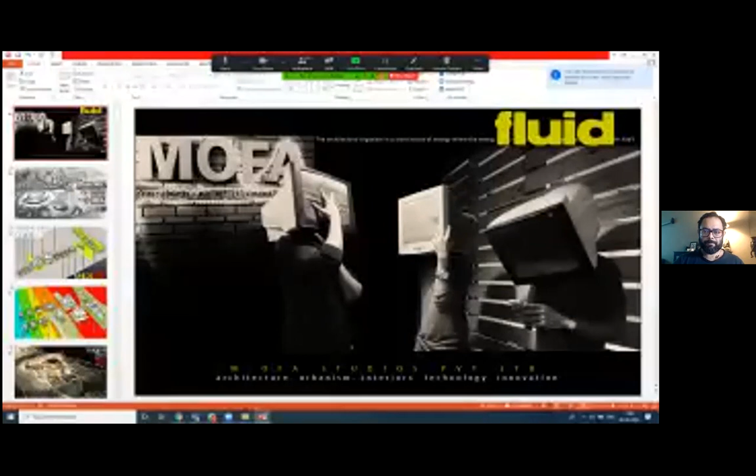MOFA, as we're commonly known, as a practice, we have been around since 2002. Although MOFA was formally formulated in 2007, and in all these years of practice, we have handled various verticals. We've handled more than 170 plus projects.

We've been around in 7 verticals, designed more than 5 million square feet of area. In these last 2 decades of practice, there is tremendous learning that has happened. Each of our works is a new work to learn for the future of our practice. It's always a work in progress. That's the philosophy we've always formulated, that no project is complete. It's always a start or a learning into a new project.

Two of our major verticals that I'm going to be covering today, one being private homes and the other being public spaces. This is a collection of a few of the residences that we have done over all these years.

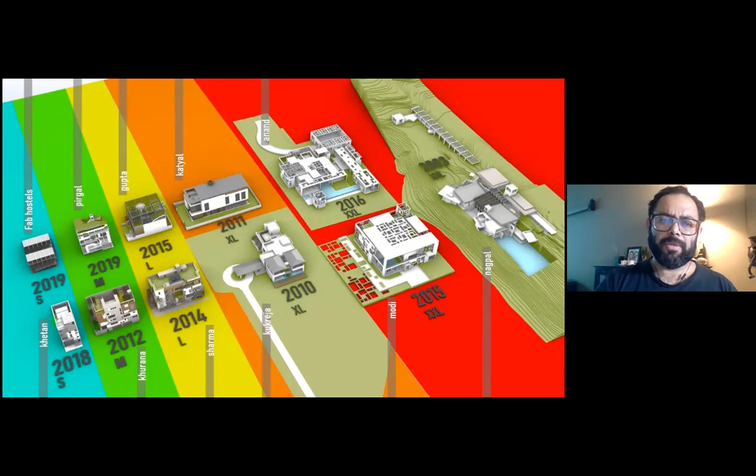What we have come down to now, in 2018, 2019, are mini homes or multi-family residences with residents of about 7 to 8, even going up to 15 or 16 people, interconnected floor-wise, not divided, on smaller plot areas as small as 160 square meters, which is literally 1/20th or 1/25th of the farmhouse plot that we had designed way back in 2003.

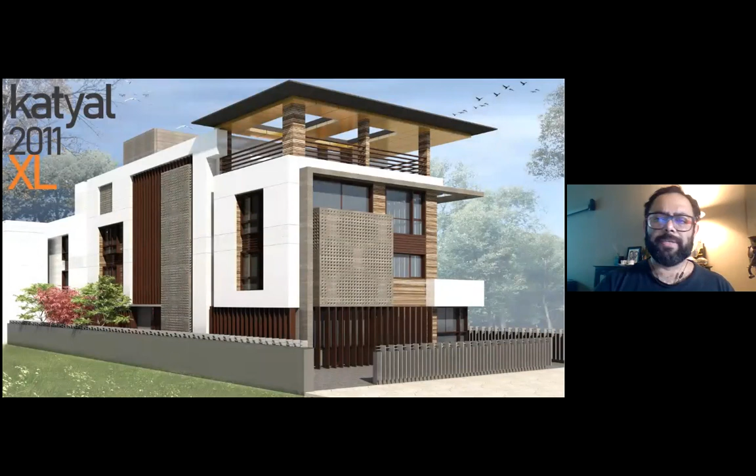The farmhouse that we did — some more large homes, farmhouses, going on to the starting of urban homes with 500 to 800 to 1,000 square meter plot areas in Delhi.

A 500 square meter plot area, multi-family residence, about 15 residents and multiple bedrooms interconnected from within. I'm not sharing details of these houses today, except for one that I'm going to be talking about.

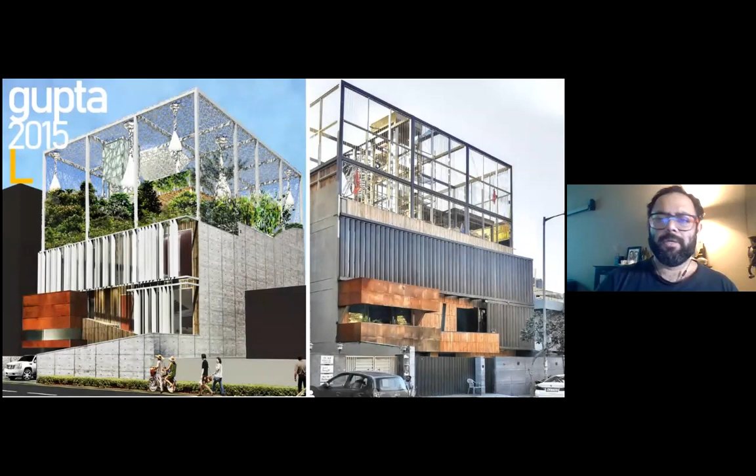Another 500 square meter plot area, multi-family residence interconnected from inside, with an urban garden or an urban forest on the terrace.

A smaller residence, again for a multi-family. The interiors have been connected through the central courtyard, a skylight, an internal space that connects all the bedrooms together.

To a house we're doing in Bangalore right now, which is less than 200 square meters of plot area, and the number of members in the family are again between 10 to 12.

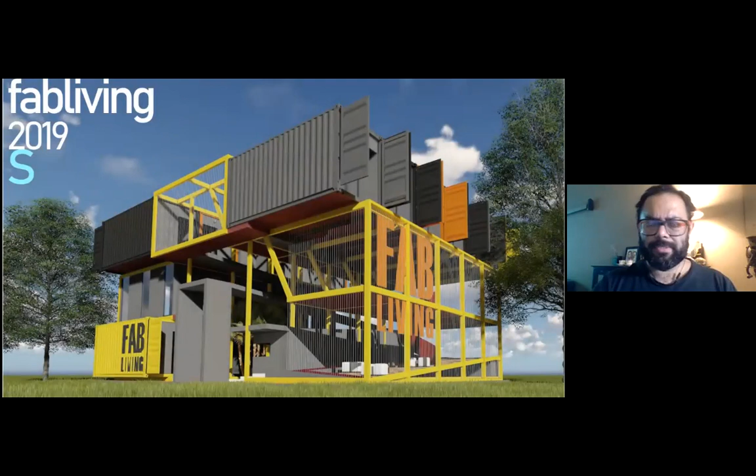A hostel that we're designing, meant for students' housing. I wanted to put this project in particular, which is a low-cost project. We're using containers to build it. About 60 students would be staying here with a plot area of not more than 60 square meters.

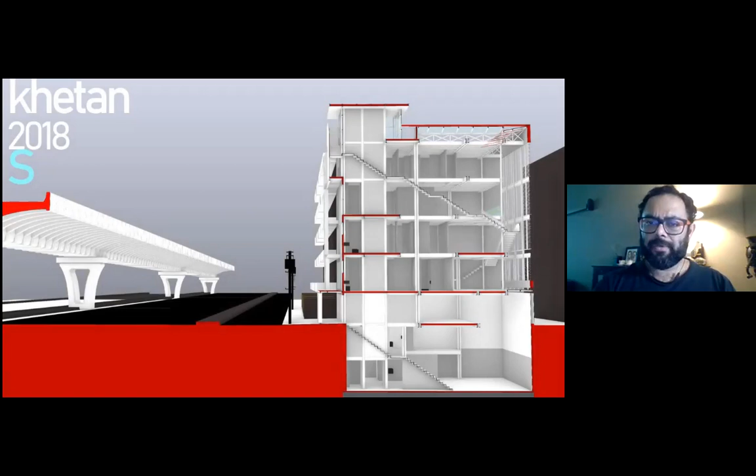To a house that we're dealing with right now in the middle of an urban setting, a highway or a flyover on one side, loud noises, urban traffic, a plot area of 160 square meters, multi-family, multifunctional.

The basement is supposed to be a dance studio run by one of the family members. The upper house is a private home, and also on the ground floor an office for another member of the family who will be running his entire office and operations from home itself post-COVID. As you can see, in a tight scenario, a lot of functions with family members coming together.

This is a house that we realized would need to be constructed in a controlled budget. We are using prefabrication within this. The entire house is done using steel construction and assembled like a kit of parts on site, put together in the fastest possible manner for saving resources, reducing the carbon footprint, and making it into this complex piece of machinery that works efficiently well together.

A short video for you to understand what this whole house is all about. That's the urban setting where the house sits.

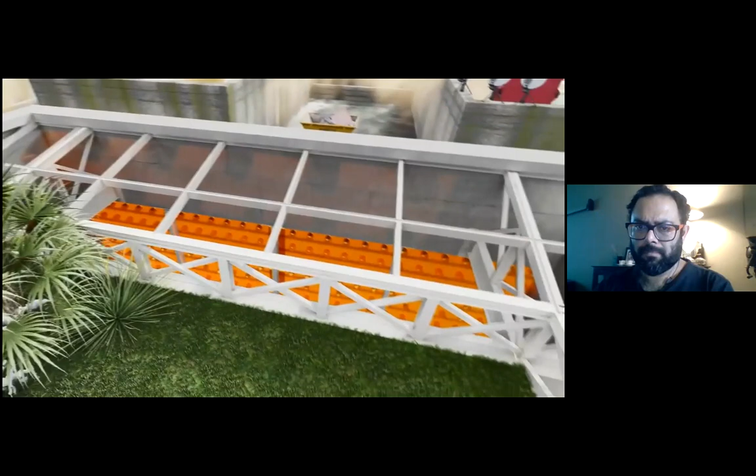Dance school in the basement.

Scale versus challenges. What we have realized over time is that with a larger plot size, no restrictions, and a lot of money, mostly clients are looking for an iconic, high-end kind of house. It's great to come up with these playful, iconic structures, but it doesn't leave us with challenges to develop a new language. As the plot size gets smaller and the budget gets lower, the challenges as a designer increase drastically for us.

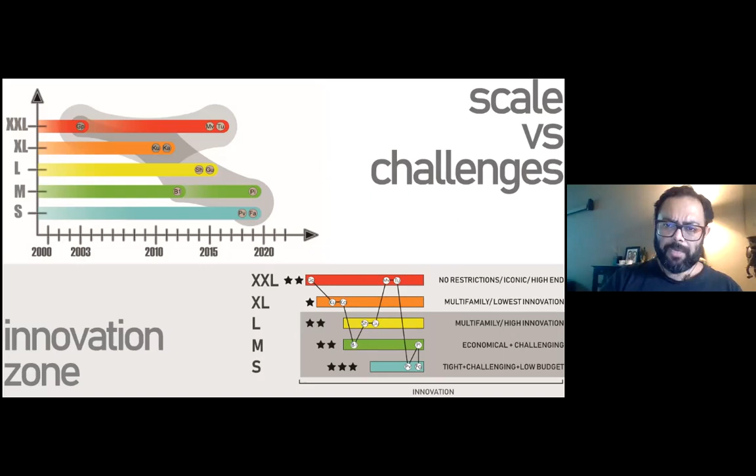Moving on from the houses to some of our other projects, and what we've learned over the years: the first 10 years, when we were understanding what we wanted to achieve with architecture, we went through various kinds of concepts—form related, context related, programmatic—dealing with a wide array of projects.

In the next 10 years, we started integrating services to the next level, innovating with water management systems and integration where various MEP systems could talk to each other, become self-generative, and become not just energy positive but also water conserving—to the point where units start producing their own energy and water requirements, serving themselves, going off the grid.

What we're looking at in the next decade is the use of IoT, bioadaptability, and a lot of simulation to test and try out our models and various project aspects. Ease of construction from fabrication in the factory straight onto the site—how we can smoothen our workflow from design through manufacturing, construction, fabrication, and assembly on site, without much error, while keeping budgets and time in control.

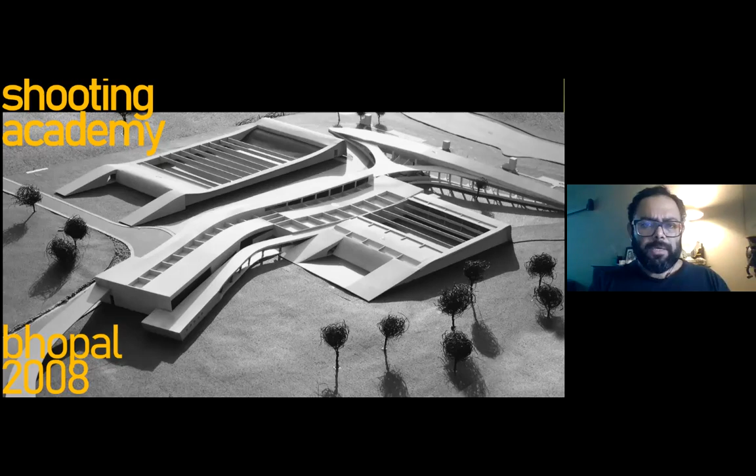An office, down to a resort which started in 2010—a project we perceived as biomorphic pods that would sit or grow out of the site just like an anthill, with units that could grow moss and grass all over them and disappear within the existing landscape.

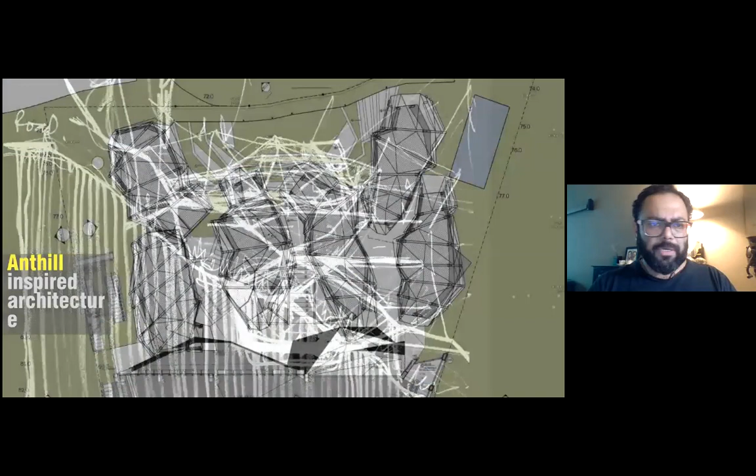On a site in Nagar, close to Manali in Himachal Pradesh—that's the site, that's the view from it. This was our first sketch, an anthill-inspired architecture: pods growing out of the hill, 6 pods which have now become almost 6 plus another 3 units accommodated underneath—9 total units in this small resort.

With the growth of moss over it—there's a lot of moss that grows automatically on rocks and concrete surfaces—we've researched a lot on the local species that grow without any maintenance on top of the concrete roof. We intend these blocks or pods to merge with the entire landscape, with just these skylights like eyes into the sky, looking and getting light through them.

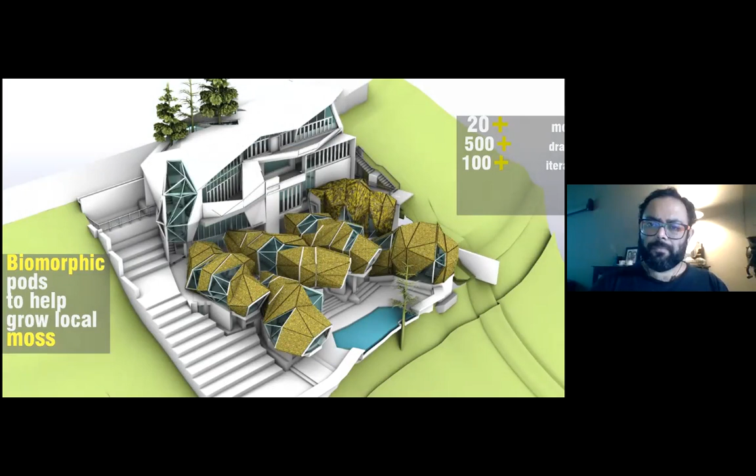Being a hilly site, the construction is extremely challenging. We are not able to construct more than 7 months in a year because of snow, rains, and other factors. So the construction has been painfully slow, and it has helped us understand a lot about the construction industry when we have to conceive designs like these.

With RCC walls on the lower level to hold these pods together, most of the units on top have a steel structure that came as prefab frames from the factory in Delhi, assembled with connecting arms in between, again done as prefab, and covered with a ferrocement shell because that was the most feasible and economical solution given the site, conditions, and budget for the project. A thin shell of 40 mm with insulation has taken care of all our needs for waterproofing and even the snow loads outside.

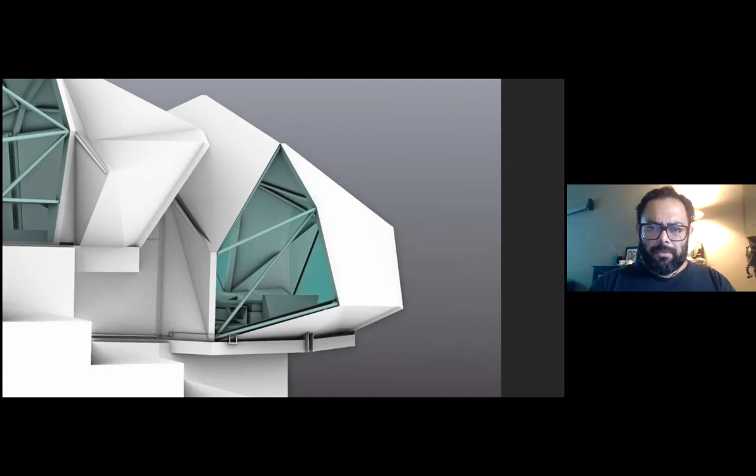The unit that sits looking onto the valley. At this stage, the glasses have also been put in, and the interiors are going on—a painfully slow process. We still haven't been able to complete this project.

One of the biggest challenges we faced was with these triangulated skylights and openings all over these pods—how to make them dark if needed, since these are resorts, and if people need a complete shutout from light in the afternoon, how would one draw curtains on them? For that, we resolved to a childhood technique of making origamic fans.

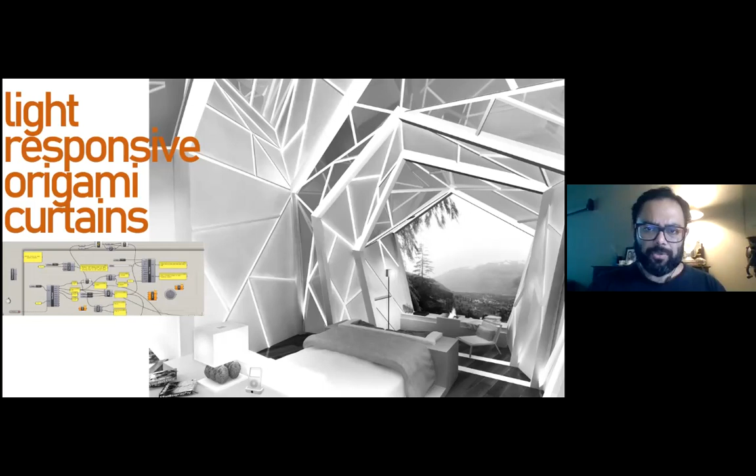We explored how these fans could be automated—curtains that open out like origamic fans, which are light responsive or could be manually controlled. We built a small prototype using a paper fan in the office, did the programming, put the sensors ourselves, and ran multiple experiments with series of changing light conditions, colors, and spectrums to see how these fans open out and how fast they respond.

Based on this, we have now proposed to make these curtains on our own. We've tied up with an agency for which we are doing the programming, helping with the hardware development, and these curtains are going to be put in place for these units.

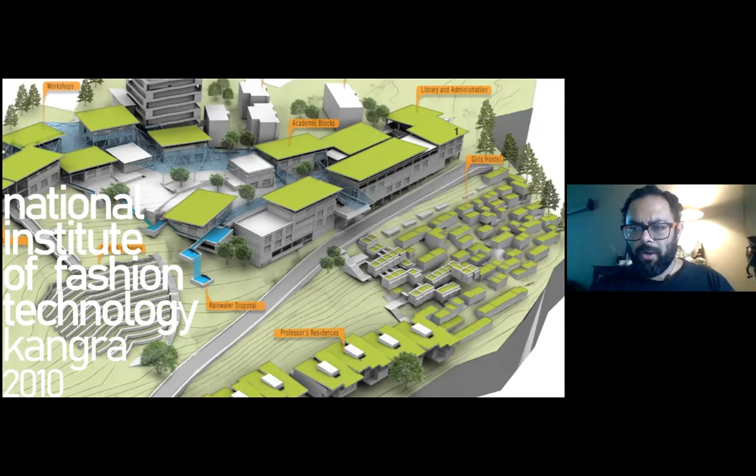Coming on to the National Institute of Fashion Technology in Kangra, 2010—we won it as a competition, an institution and a student housing on a hilly site of 16 acres. Kangra, if you know, near McLeodganj is at a moderate height, and the site offered us a difference of about 40 meters from the lowest to the highest point, with almost 60 to 70 banyan and mango trees.

This is the site particularly for the hostels or student housing, where we decided not to cut even a single tree or touch a single branch, but to map the site in detail—including its contours, trees, branches, and foliage—to such an extent that we could do an integrated design within this whole scenario.

So right from contour mapping, dividing these spaces or rooms—which we called modules of 10 feet by 10 feet, rather 3 meter by 3 meter—we divided the entire site using a grid of functional cubes, in a way that another thing we didn't want to do was grade the land.

We didn't want to cut the land and make platforms, usually how it's done in the hills for any modern construction, because not only do you lose the ground cover, but you also lose in a lot of areas the natural water flow that was always there on that site.

So we wanted to go with the natural flow without disturbing the land and place the units exactly how they could organically come up, like any other village in Himachal or Kangra, because each of those units comes up wherever it is without disturbing the sensitive balance of the land.

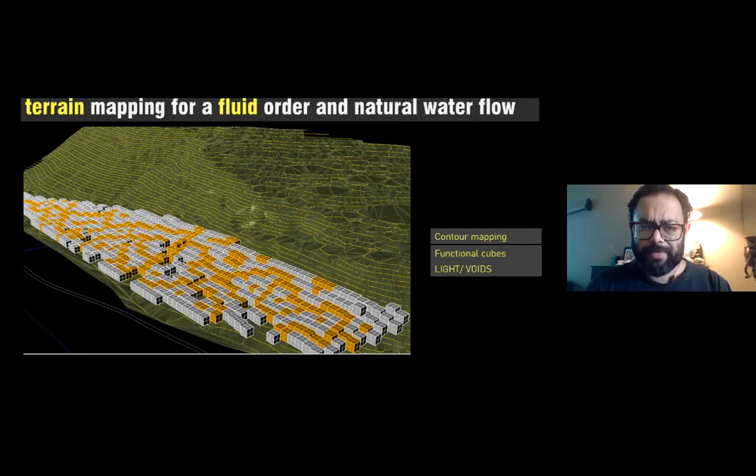Introduce the light cubes where the voids, lights for ventilation that would come in, the circulation routes, plinth formations, the lower level, upper level, vertical connectors.

The entire plan sort of emerged in a very organic manner, where these cross fingers of corridors ran at various levels, each of the units also sitting at their respective level of the contour itself.

Some photographs during construction where the existing trees are respected and held together using retaining walls, a larger area around them. Each tree was given close to 3 to 4 meters of area so that the roots could have enough space to grow and not jostle with the concrete or the retaining walls of these structures. So the existing trees and the architecture are integrated within that network of trees.

Steps, corridors, each unit at a different level, a simple language that helped us achieve a lot of outdoor spaces for the students to sit around, to think, to mull over, and a perfect ideal setting for a design institution.

In 2010, we won another competition to design an office for Delhi Pollution Control Committee. Here we wanted to create an example of an office that would go completely off the grid. And being an office for Delhi pollution control, we wanted to create an office that does not create any pollution.

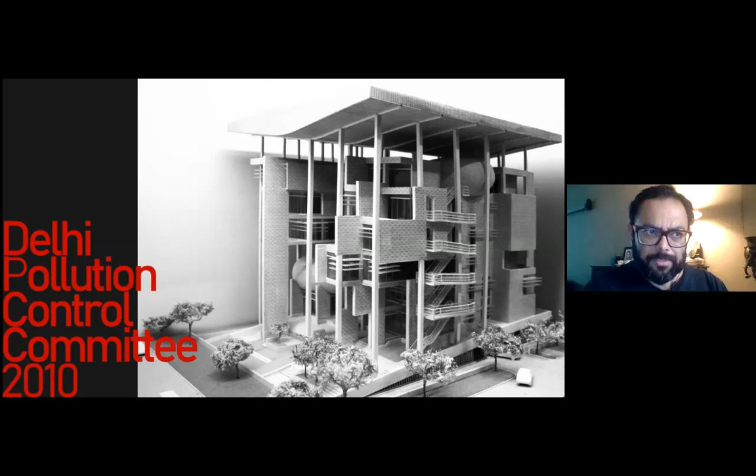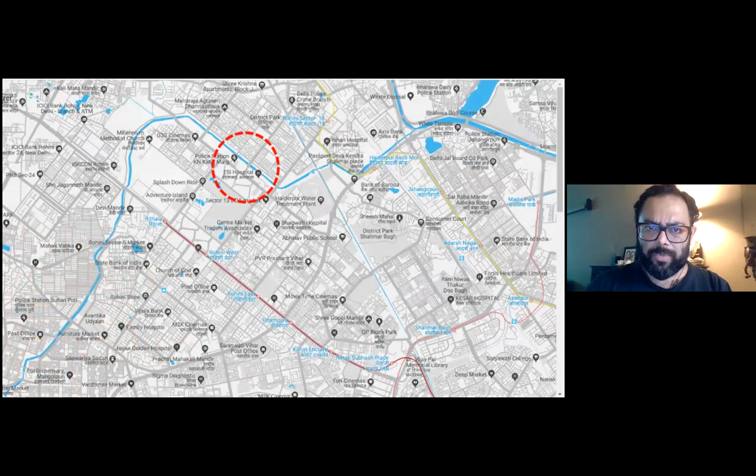Not just that, it also absorbs the pollution of the surrounding area, the context, like a sponge. The site given to us was in Rohini, next to a sewage drain, a large nala, which we used to our advantage.

We proposed to the government to tap the sewage water from that nala, generate gas for energy, liquid to use for our radiant cooling systems in the air conditioning, and the remaining segregated solid matter as manure for the vegetation all over the project.

We drew out a very detailed integrated systems plan, a flowchart of some sort where one system would help the other in terms of talking to each other. Using IoT, each of these systems would create or restore that balance where the entire office does not have to look for any energy requirements from the outside. It could go completely off the grid.

It would generate its own potable water from the rain, and it would manage its own garbage in terms of generating energy. Plus, it would use the sewage water from outside to generate energy.

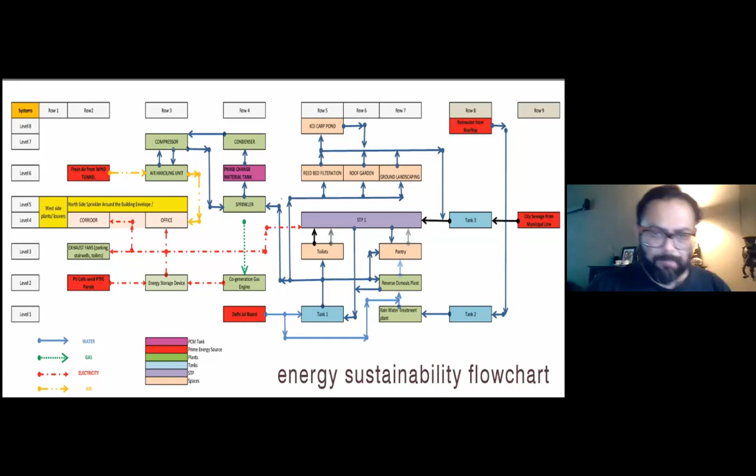At the same time, we worked with some scientists from Ahmedabad to come up with bentonite walls, or clay walls, that could absorb a lot of carbon particulate matter from the parking lots and give out clean air into the environment.

So as a concept, it was well worked out in how it was going to be. We had TERI involved with us doing the systems management and coming out with an entire report. Unfortunately, the project got stuck with DDA in Delhi because of bylaws.

We were not allowed to build that roof on top, and we were not allowed to do a lot of these setbacks and things. So a project of this kind, which could have become an office for the future, was just closed in our books and for our future studies.

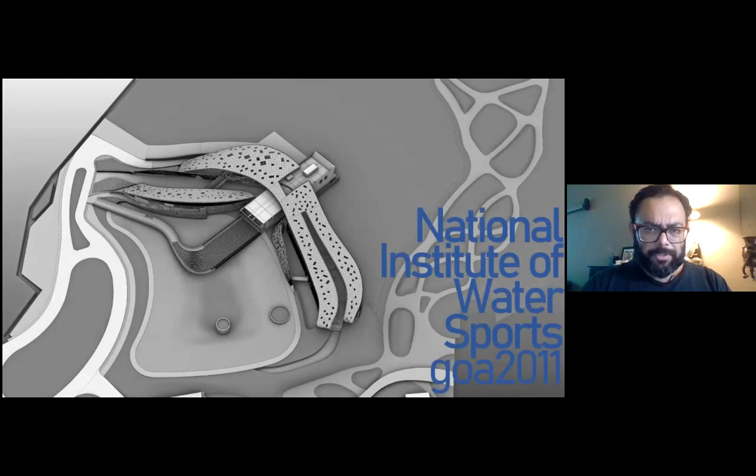Another project in 2011, National Institute of Water Sports in Goa, won as a competition, set us onto a new challenge in construction, a new challenge in technology, and how to manage projects of this scale, not only by integrating prefabricated systems, but how to use parametric architecture and simulations to test each and every aspect that goes into building a project of this complexity and nature.

As a concept, we saw this building as a link between the sea and the surfer. Now, National Institute of Water Sports, if you guys know about it, it's a Ministry of Tourism venture in India.

It's one of the only kind of project in Asia that gives licenses to adventure water sports players. It does training courses for the Navy in scuba diving and rescue operations, also training courses for lifeguards all over India, and for all adventure sports related activities. So it's one institute that takes care of everything related to adventure sports in water, rescue operations, and even Navy operations.

So we saw this building as a very dynamic link between this energetic water that you're always dealing with, or the person who was always entering the sea, and we wanted to translate that same energy field in the language or storytelling of the architecture.

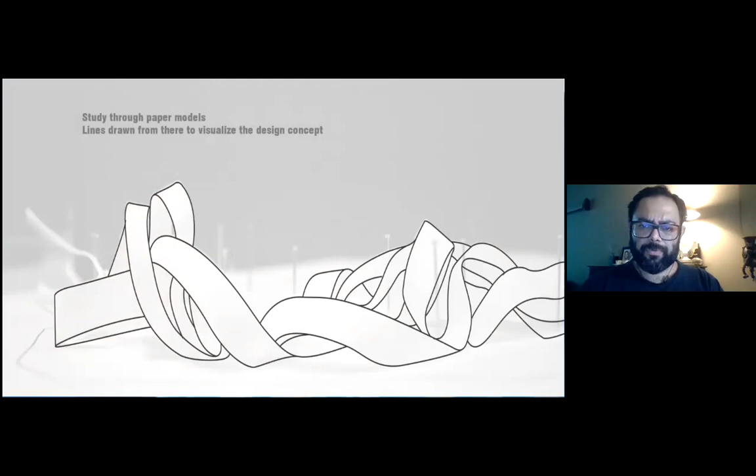As a link between the sea and the surfer, as a tussle between the two, as a tension between the two, we wanted to have this sort of tension in the form and its spaces replicate it, and to stay as and when a person walks through it, to feel that kind of tensile forces through it. We started with the study of paper models to visualize how the waves, how the interlocking of the form, how these things could work.

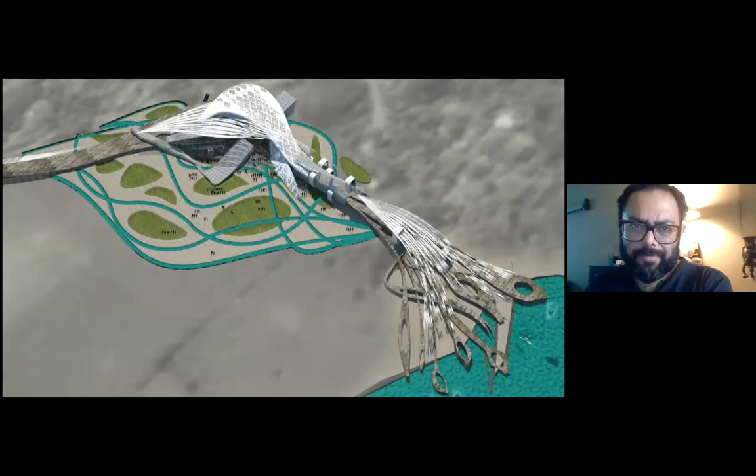Through a series of paper models, through a series of experiments, I think we must have done close to 70 to 80 iterations of this, clicked a lot of photographs, and we finally came up with the first model, which looked like this, which literally is a link between the land and the sea with these jetties going out into the water.

This was a competition entry from which we won the competition. And when we started building the project, it had its own set of challenges with this roof, which is more than 4,000 square meters of area, completely parametric, no module equal to each other, and a mammoth construction that lies in front of us. Because if you know, government constructions could be tedious.

It's done by contractors who are not, it's a low cost, it's L1 bid. And to build a building of this sort has challenges equivalent to, let's say, if you're building a rocket and you're giving it to an L1 contractor, which usually does happen with building rockets in NASA also. But you have to be very, very clear about your documentation, about your drawing, or what you're proposing and how you're doing.

So a tedious tendering process, a detailed tender was done by us. We knew about the entire construction at the time of tendering process, which means the working drawings were completed beforehand. More than 200 iterations of the roof were done, simulated, generated, with daylight simulations, skylights, how they would be, depending on what space requires how much of lighting. That was the first analysis.

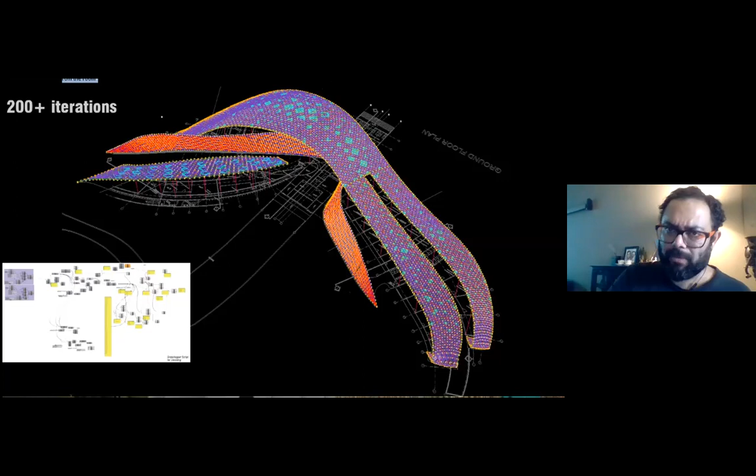And an organic model was developed. We had to control costs. We had to get accuracy of this parametric design. And the accuracy we set was a tolerance of plus minus 10 mm, not more than that, for a project of this scale.

Being restrictive in its budgets, we could not use cranes or other mechanical means to assemble a roof of this kind, which means we had to subdivide this large roof into smaller modules, like a small puzzle, which could be assembled back onto site again. So a streamlined roof was designed, which could also dissipate the wind pressure coming from the sea and make it more structurally safe and viable.

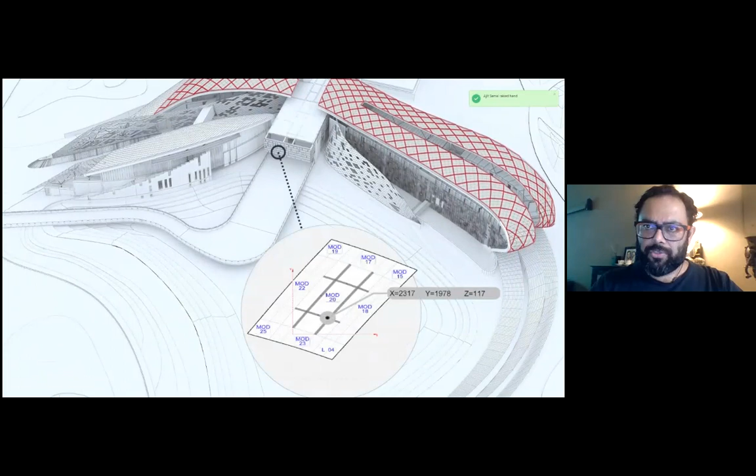To build each module, all the working drawings, all the fabrication drawings were generated within our office. X, Y's and Z's for every part of the joint junction detail were given. And that was assembled. The Z's were achieved by all the waste reinforcement that was lying on site. So we built a platform of 5 meter by 5 meter in steel, a flat platform, and all the Z axis was achieved by using waste reinforcement cut into exact sizes, stack welded, so that each and every module could be individually made, generated like this, lifted by hand, joined together, welded into a large composite roof.

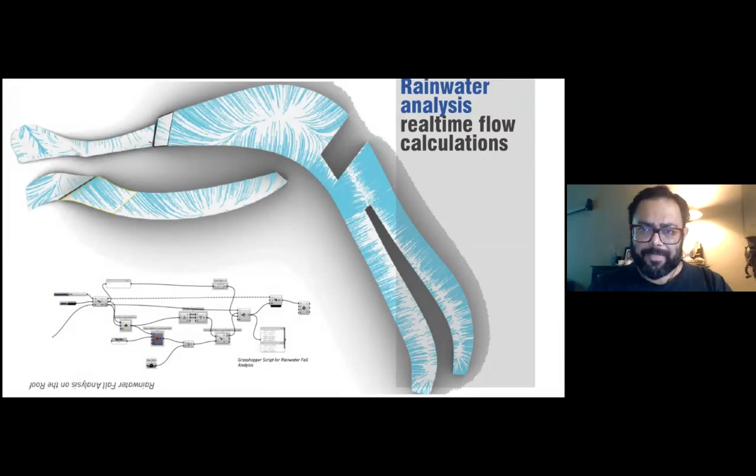We also did a detailed water analysis, a real-time rain analysis of Goa, because rains in Goa could be monstrous. If you've not designed for it, it could be a disaster. Looking at the water flow analysis, we were able to design the gutters.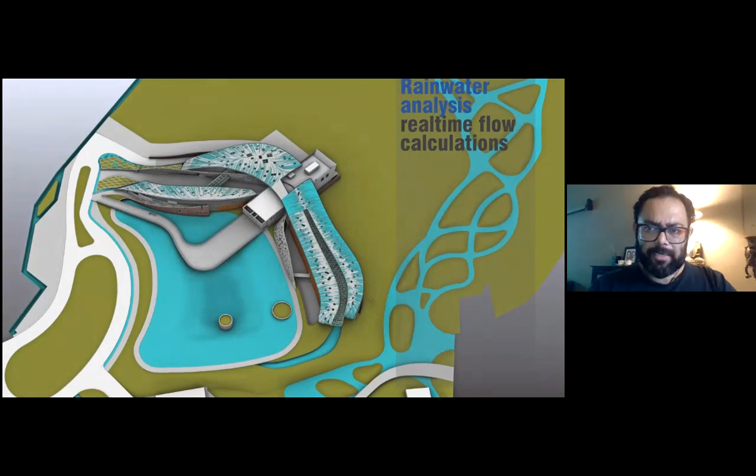We were able to design the water flow on the entire site, thereby creating a large water collection pond, also for use as potable water for the institute, and create these on the periphery, this entire barrage of mounds, which could break down the high tide waves coming from the sea, so that they don't flood the entire site during high tides and high wind and high storm situations.

A double roof, with the help of my friend Samir Kumar, who's also from CEPT and my batchmate. We came up with this entire double roof pressure equalized system, which I can explain in detail much later during the questions.

More than 5,000 drawings were generated for the roof. For the roof panels, we used a simple color-coated sheet, the cheapest available material in the market, to make these origamic folded panels, assembled on site, which is going on right now. All the panels have been factory cut, CNC bent, brought to the site, and are being put up as the final roof.

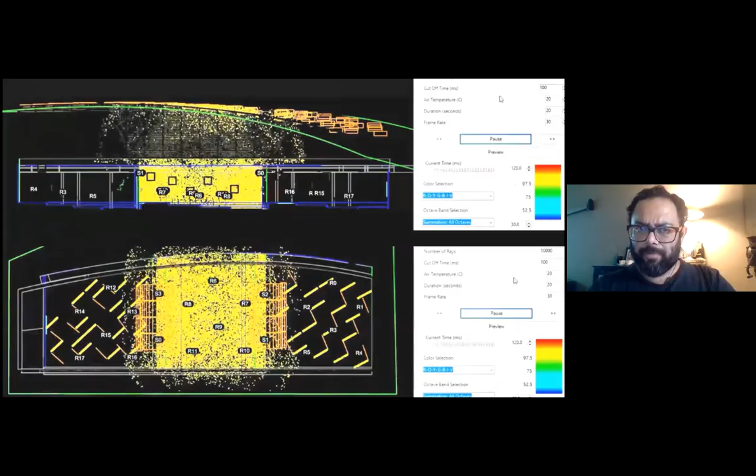Being a large open roof, we needed to do an acoustic simulation so that the sound from one classroom does not spill over to the other. We designed these floating acoustic clouds, which suspend from the ceiling, and ran a lot of simulations placing speakers and volumes with various people as receiving and delivering points, checking what is the best insulation material and design to prevent sound spillage between classrooms.

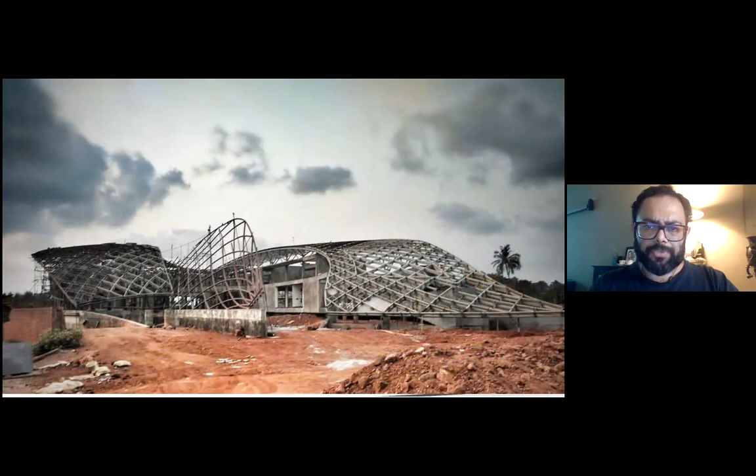So this is a project which is almost towards its completion. In the next 6 months we'll have this building ready. Here are some photographs during construction, taken last year, from the model to the actual construction. We managed a tolerance of not more than plus minus 10 mm, and the entire roof is precisely fabricated as what we had planned.

It's a relationship to the sea.

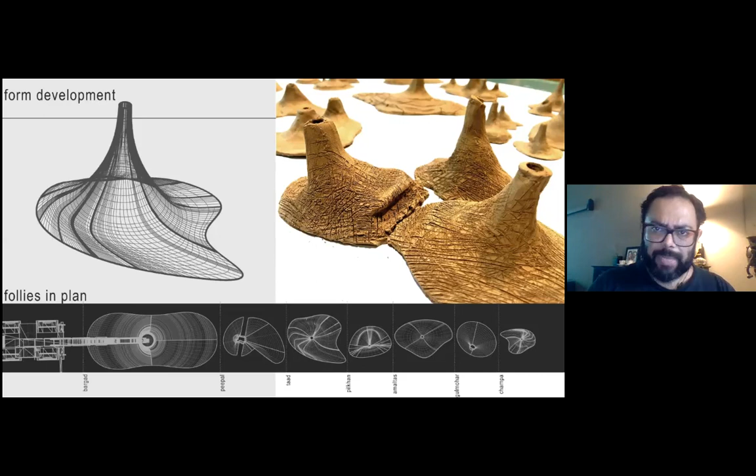We created this as a dedication to all the trees being rampantly cut in Delhi due to rapid urbanization. We studied about 8 different trees commonly found in the landscape of Delhi and represented the cut forms of those trees. Usually when trees are cut, the stubs are left behind, and those stubs remain in the city as this ugly reminder that the tree has been removed. So we used that expression of the stubs, created through scrap steel, as a giant 1:1 scale reminder to people of what is happening all across due to rapid urbanization.

A lot of models were done in clay to understand the form. We worked with Sushant from RatLab, who had also interned with us before going to AA in London and then Zaha. I collaborated with him, and we worked on the site itself for about 8 days.

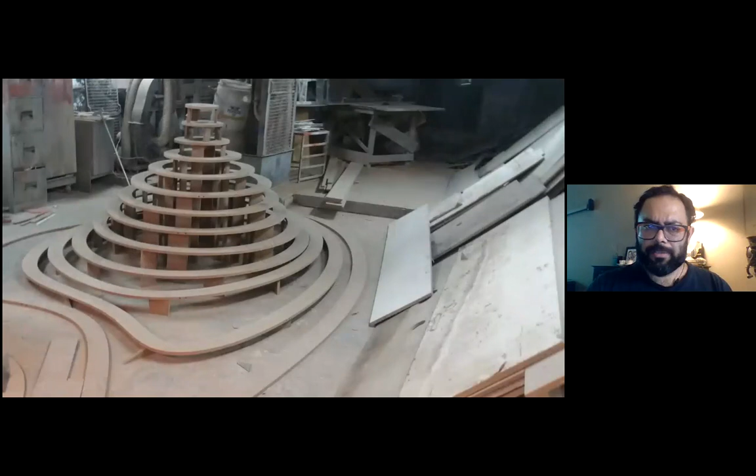No drawings were created for this project. We worked only through models and through coding. The internal structure was done using MDF, and then the outer structure was assembled on site by various craftsmen using their own individual techniques.

So the group of craftsmen each came up with their own technique of welding these 1-inch metal strips. We collected a lot of scrap metal from the market, got it cut into strips, and the entire structure was covered using these strips by the craftsmen individually. Individual patterns of weaving and covering emerged over a period of time, over these 9 days.

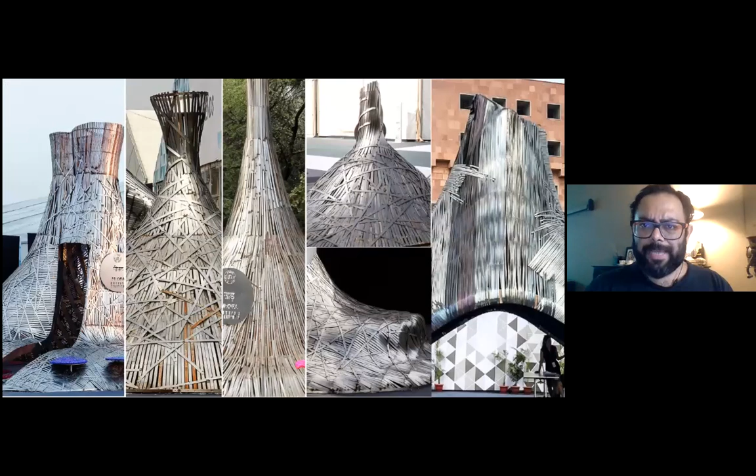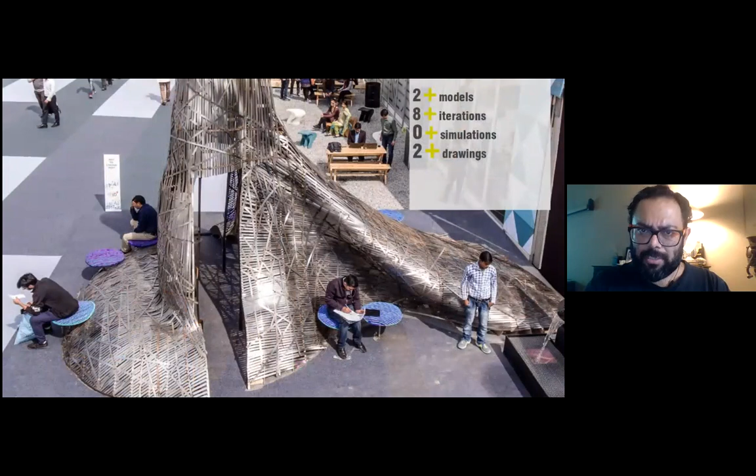What we were able to understand and study was how the human mind works, or how a craftsman's mind works. Usually we work with a lot of written algorithms, but the problem with an algorithm is it's written by one person, so it doesn't have the complexity of the human brain. Here we wanted to integrate an algorithm written on the computer along with 40 different brains, who would integrate it together seamlessly and come up with something new and unpredictable. So a right mix of intuition with logic resulted in these forms, these skins, these structures, which shimmered in light and looked different. A small movie just to show how the assembly happened and what these structures are about.

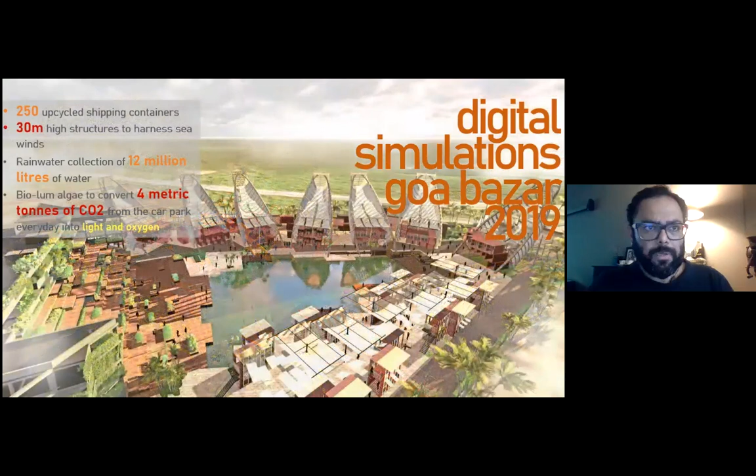In order to understand wind, we did a detailed CFD analysis. It took us about 6 months, where we got real-time data from the meteorological department, wind movement at every 3 hours over 1 year, and we simulated that to see how the wind could be brought down, whether it would work with the structures, and how the structure could be changed, revised, or formulated, keeping in mind getting these winds.

What we were aiming at was a feels-like temperature. A feels-like temperature is a combination of a dry bulb temperature that you measure on a thermometer, relative humidity, and wind speed. In simple terms, if it's hot, less humid, and there is wind, you will feel less heat compared to a high humid area.

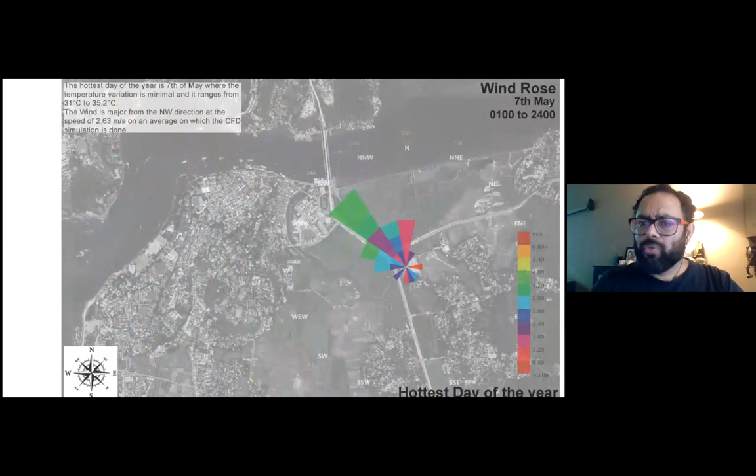So we wanted to create a better feels-like temperature on the site. We considered in simulation the hottest day of the year in Goa, 7th of May, temperatures ranging from 31 to 35 degrees with almost 100% humidity. Wind speeds at 2.63 meters per second was used for the CFD analysis, and the major wind direction being northwest.

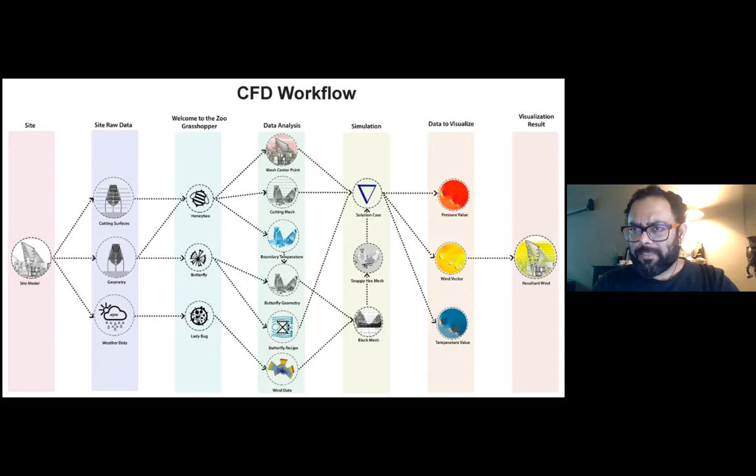Multiple data analysis, right from raw site data, structures, and weather data was put into various softwares, including Grasshopper, simulated, combined together, visualized, and the visual result was put together, which I'm going to show you today. What we were able to analyze was that we were able to get the comfortable feels-like temperature from 33% to almost 44%, double the amount of what would be achieved without the use of any air conditioning or mechanical methods on ground, like large open coolers which would just run with sea winds.

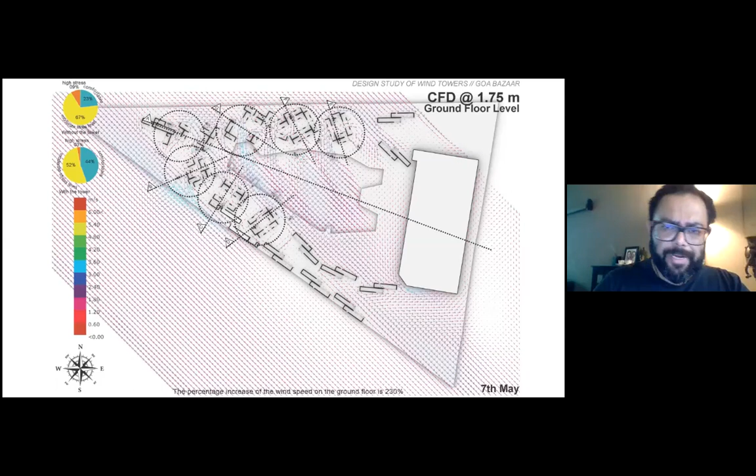A visual simulation, just to make you understand the principle behind it, is basically funneling that large wind from the top down to the ground and naturally ventilating the site.

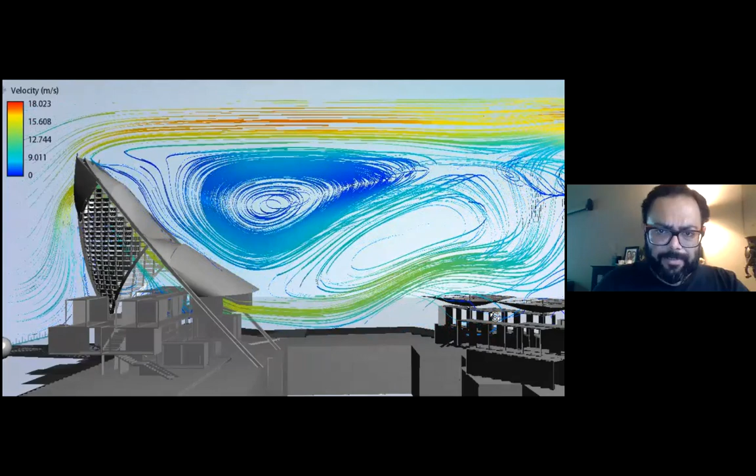An adaptive reuse competition we entered last year in association with BRMA, Batul Raj Mehta and Associates. Batul, again being my batchmate from CEPT, was involved in the museum planning of Bihar Museum with Maki Associates, and we associated with them to formulate the program for this project.

There's a competition that we were entering in Kashmir. This is an adaptive reuse of a 120-year-old silk factory complex into an arts and crafts center.

What was important about this project - this is a site photograph. Who are our stakeholders? What is it that we want to build? How do we want to go about it? Three important questions, along with a conservation approach and methodology of studying each and every building.

We made detailed documentation through drone shots and various other methods. Then Article 370 came in and we could not go to Kashmir, but we had enough drone shots for us to generate detailed drawings and the entire model for us to simulate and work together.

Our vision for the program was to celebrate Kashmir, revitalize the skilled craftsmen and the industry, and make the project highly viable by making it self-sustainable.

Three stakeholders: local community, creative community, and the cultural tourists who would visit this Resham Khana. A cultural tourist platform, a community platform, and a creative platform with a functional diagram was developed by BRMA, which was given to us for us to work further on this project.

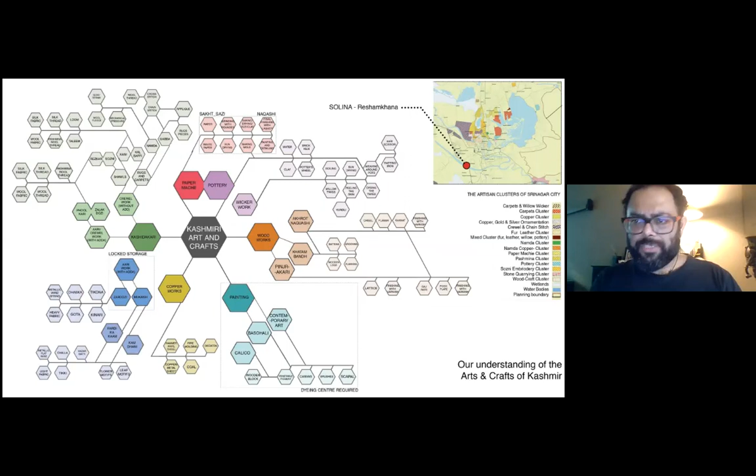This was supplemented with a macro-level industry map spread all over Srinagar showing how each and every craft usually works. We mapped the existing trees as usual - mulberry trees, chinar, and walnut on site - and studied the water flow, as this is a highly flood-prone area.

For design intervention, we realized which buildings have to be restored, altered, some buildings that need to be rebuilt, and the newer construction which had come up as an ugly intervention to be demolished.

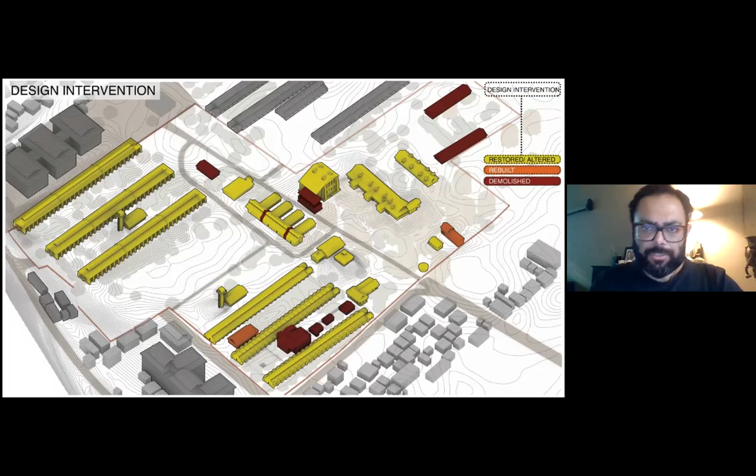A zoning concept emerged from there where we realized that there's a third space - an undefined space - that needs to be generated or created in the form of urban plazas within this.

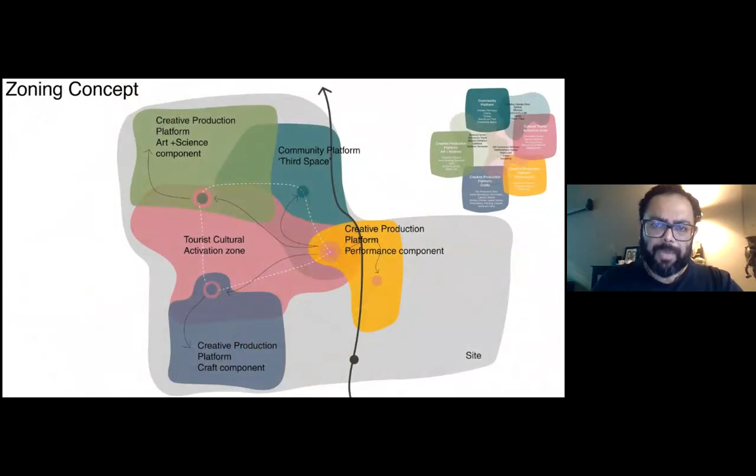We simulated people, creating a lot of codes and simulations where we could look at densities versus occasions and events on particular days, simulating the most probable pathways taken by people. This helped us in allocating functions to those existing buildings.

The most walked paths or the most walked areas, or the shortest routes taken through these multiple simulations, helped us distribute the program in a more justified manner. We simulated various scenarios, from regular days to festival days to weekends, to see what kind of public or people would travel to these places.

There's an existing mosque out there built locally. We wanted to create a sacred plaza, removing the boundaries so that each of these plazas becomes another center for this craft center to grow further in a network within the surrounding areas.

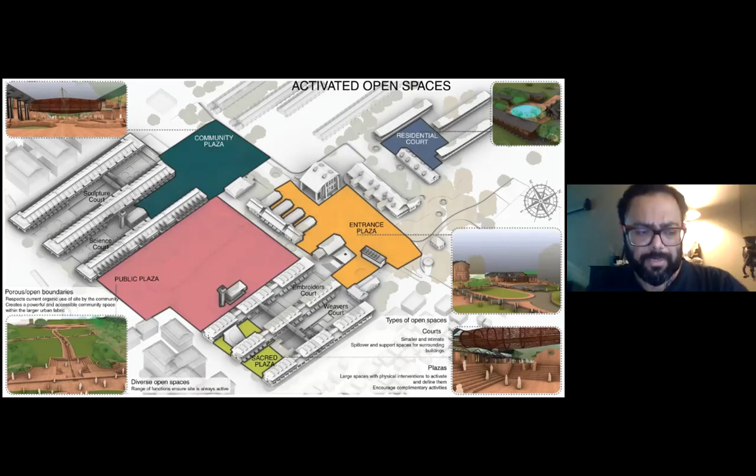So right from a sacred plaza to an entrance plaza, a large public plaza, and a community plaza, including a residential court for the resident artist community, was conceived within this project.

A design approach of zoning of interaction between the urban and the community.

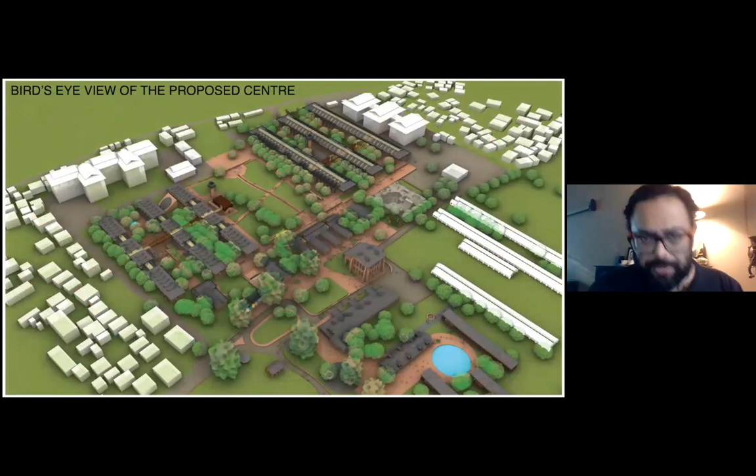We changed the roof forms and used the old GI sheeting, which isn't really traditionally old, it was replaced over recent years, and used that sheeting in weaving these bridges that I'm going to show you.

The overall plazas, views, scales. These bridges that you see, which connect like fingers between the various sections of the building, are again inspired from the spindle-needle relationship of a cocoon and the silk industry.

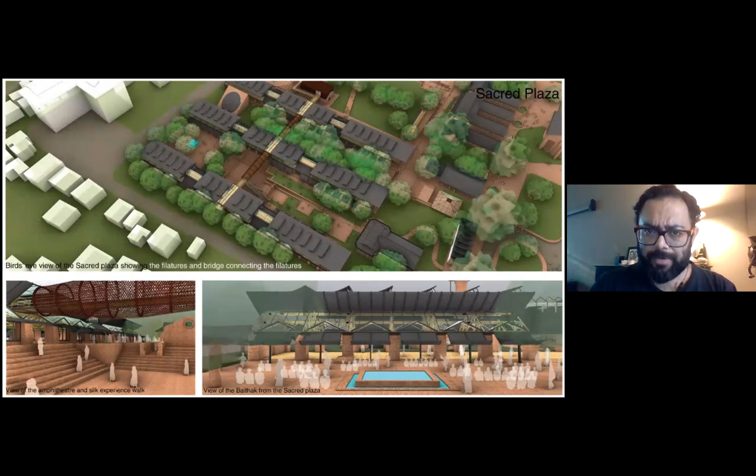The Sacred Plaza, where the mosque we decided to rebuild with the community and turn into a large plaza, including a Baithak for Sufi functions. There's a lot of Sufism also in Kashmir, which we wanted to increase and promote.

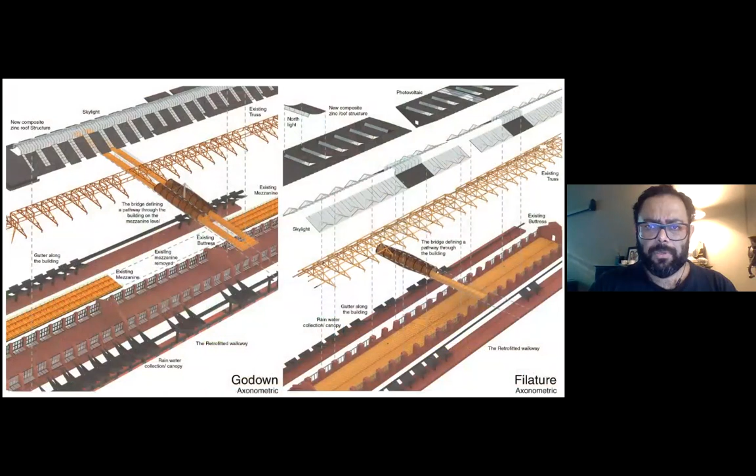We open out the view. The extended roofs were an expression from the existing wooden trusses of the building, as inverted trusses at the same angle, a mirror image to create an interface between the outside and the inside.

The urbanscape installation we did was based on what we studied in terms of creation of skin. We wanted to utilize it here using the GI sheets that come down from the existing roofs of all those buildings, cut them and weave them like a silk cocoon, creating bridges that run like fingers through these buildings as interconnections.

So I'm almost done with the projects. Some of the studies we're doing, we are also writing codes to do automated parametric modeling. For this project in Goa, rather than what usually happens in government projects, where program changes, footprint changes, and you have to change all your drawings all over again.

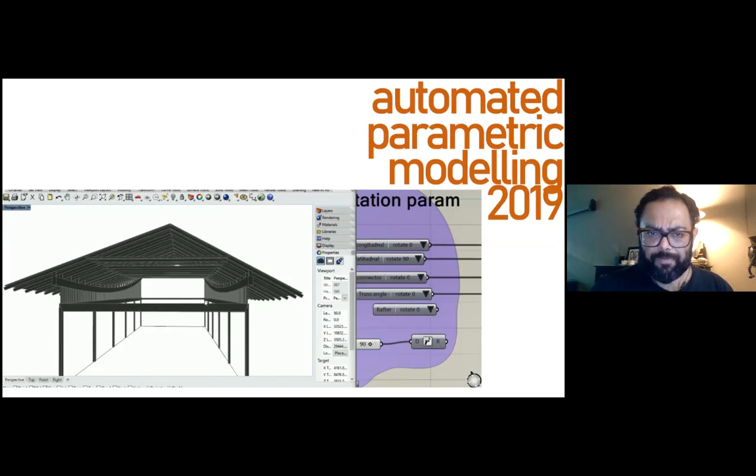A building of this kind, conceived as a steel construction of various parts and components, we wrote a program where with the change of the footprint itself, the entire system could readapt by the click of a few buttons. So we don't have to do working drawings all over again, just with the change of the program or a few parameters, the entire system could be automated.

So whether it's changing the roof angle, the extent, the spans, or the footprint, everything is possible within this, which could go using BIM software into construction itself. That would not only change the overall form, but redivide, recalculate, and recalibrate all individual members, including all connectors, by itself within minutes.

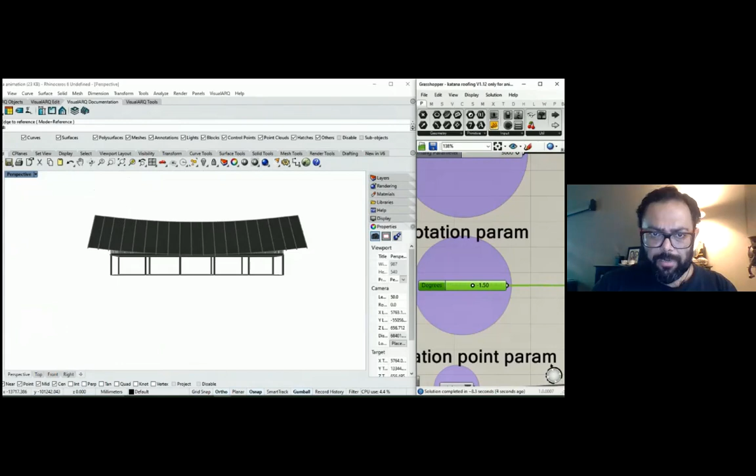Reconnected with the BIM software, this would help us change drawings in a matter of seconds, not even an hour, which could usually take days for any architectural office to do. We're continuously writing codes like this, codes that help us understand bylaws, and automate certain building systems, skins, facades, and services.

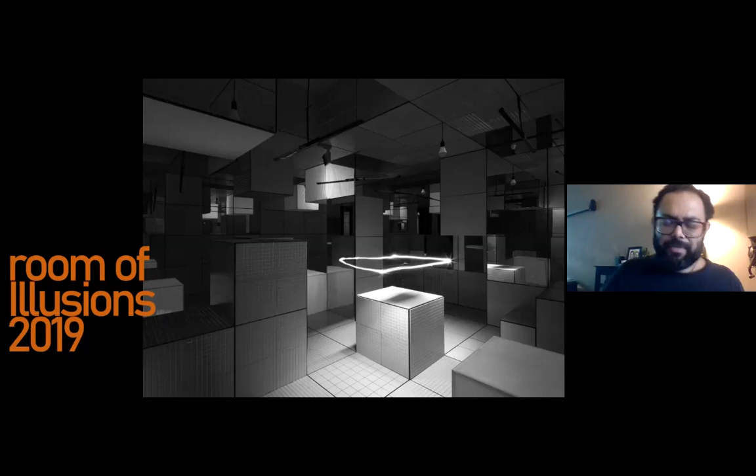Depending on whatever path you took, it creates a certain algorithm, and based on that algorithm, it changes the simulated scene for that viewer, what that person sees within the room. This creates multiple illusions for various users, each with a different experience, a series of experiences or programs generated from a single space.

With the use of reflections, illusions, and sensors, we created this entire gamification of a space. Here's a small video of what it is.

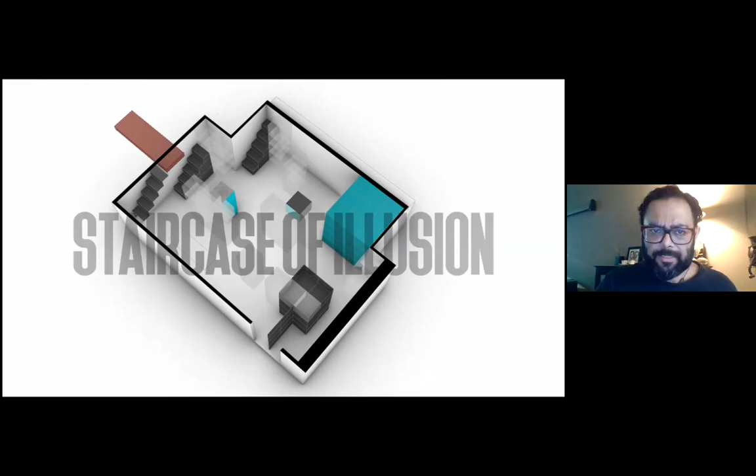Staircases, room of mirrors, objects, infinity staircases, a lot of these anomalies, and the sensor tiles.

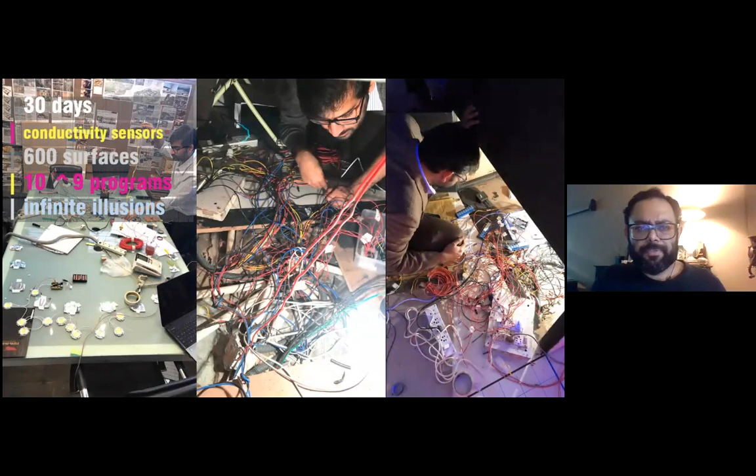The programming, conductivity sensors, hardware to software was done within the office by Anuj, my partner, who's an expert with this. It took 30 days to program it, about 10 days on site. And that was the result. That's it, thank you.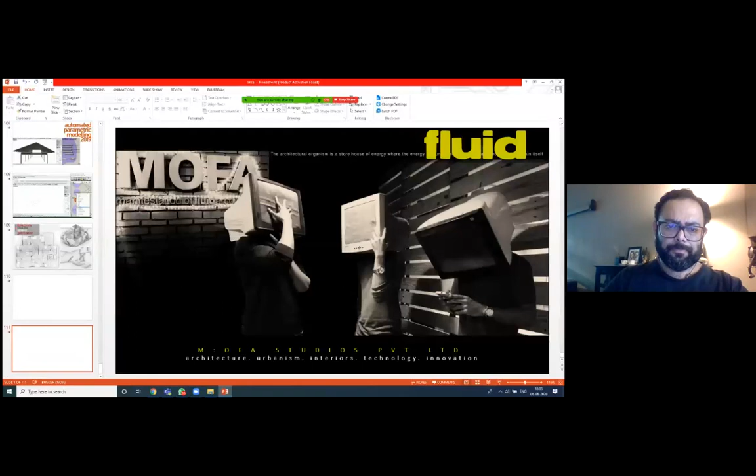Hello. Yeah. I'm open for questions now. I hope I'm in time.

Yeah, Manish, wasn't that too long? No, that was not.

I'm very happy that I actually not just coordinated but also attended the lecture, and I'm really happy and proud of what you're doing - quite an eclectic body of work. Since I've studied and done my master's abroad, I'm in touch with a lot of friends working outside, so your practice is a very global practice compared to the kind of practices I've encountered here. So again, brilliant work, Manish. Thank you, thank you, thank you so much.